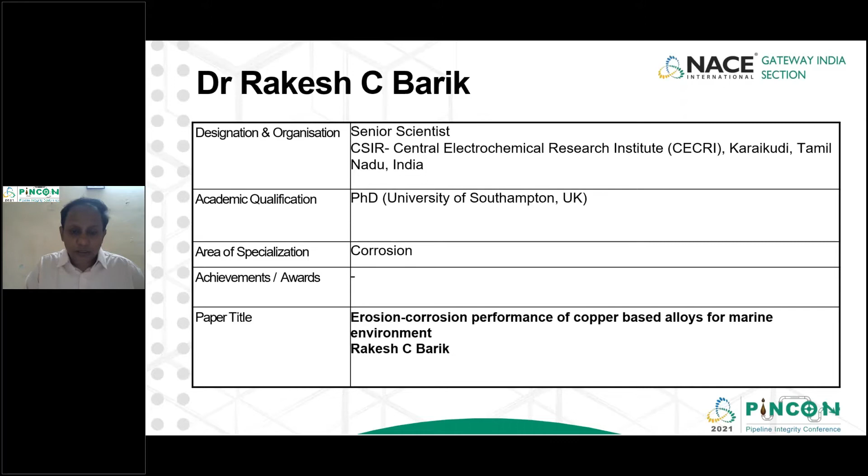One of the areas I focus into is erosion corrosion. So what I'm going to talk about is copper-based alloys, and we all know it's very widely applied in naval applications or in marine conditions.

However, pure copper is not much used. But when it comes to alloying elements like cupronickel, aluminum bronzes, or nickel aluminum bronze, which is nothing but copper-based alloys, they have extensive application in the marine environment.

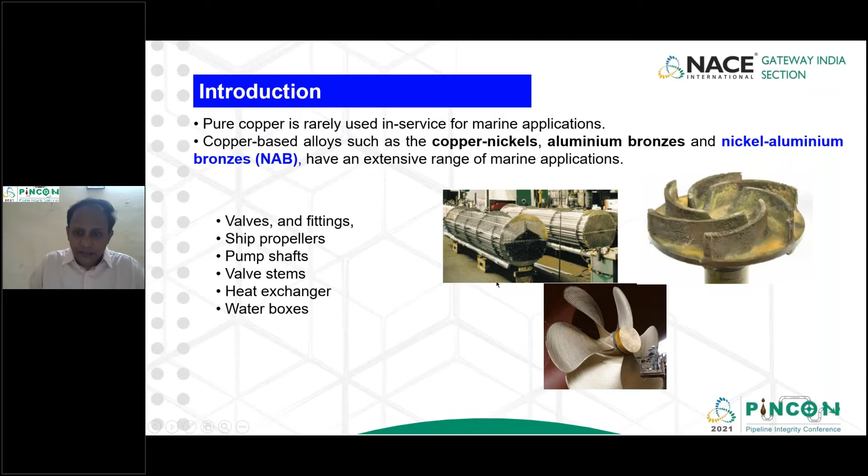If you look at these components I have here, like valves and fittings, ship propellers, pump shafts, valve stems, heat exchangers, and water boxes, these are the wide applications of this copper-based alloy.

And here I have the properties. For example, when you look at a component, if it's in open sea water or in dry dock condition, what properties can influence your corrosion behavior? Whether it could be shear stress, or mass transport due to flow corrosion, or having a protection strategy like cathodic protection, or various environmental parameters like temperature and salinity.

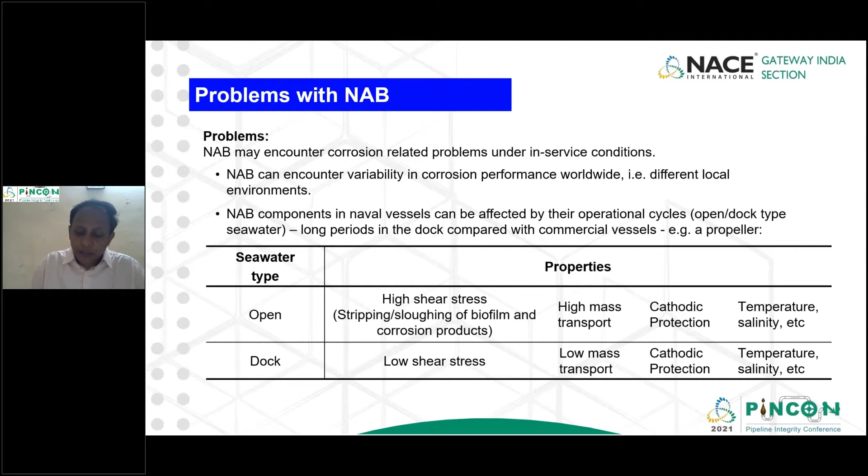But all these properties can vary from one place to another. That's why these components are affected by the operational cycles, which is very tricky when you choose copper-based alloys for a marine-based application.

In this particular research, I took a nickel aluminum bronze, which I'm going to talk about in terms of composition and all that. I studied mostly the flow corrosion, erosion, and erosion corrosion behavior, and compared it with an alternative, which is actually a coating. The coating was achieved using HVOF coating.

It's called high velocity oxy-fuel process. In that, I coat this nickel aluminum bronze material on the surface of a mild steel to achieve this cast NAB property. So now we'll see, as we go through the presentation, how it behaves.

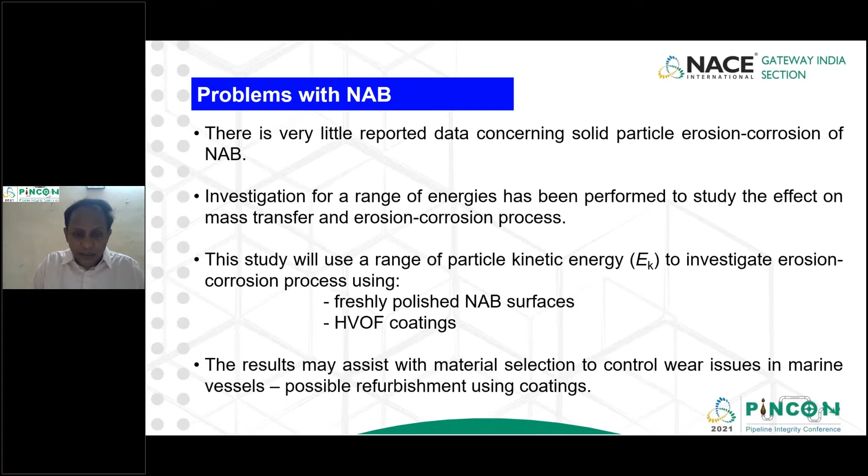So this is the actual composition of the cast NAB. If you look here, the major component is copper. Though its name is bronze, it doesn't have any tin content. This nickel aluminum bronze contains major components like nickel, aluminum, and iron. We can see aluminum comes to 9 to 10%, nickel and iron like 5 to 6%, and the rest of the elements are like chromium, with the balance being copper.

Then I'm comparing with the NAB coating, which is done using a spraying gun, diamond jet HVOF spraying gun, coated on a bare steel surface, which is 4360 steel, and also compared with AB, which is only aluminum bronze, where you have a variation in the composition of aluminum, nickel, and iron, plus some other components like molybdenum and silicon.

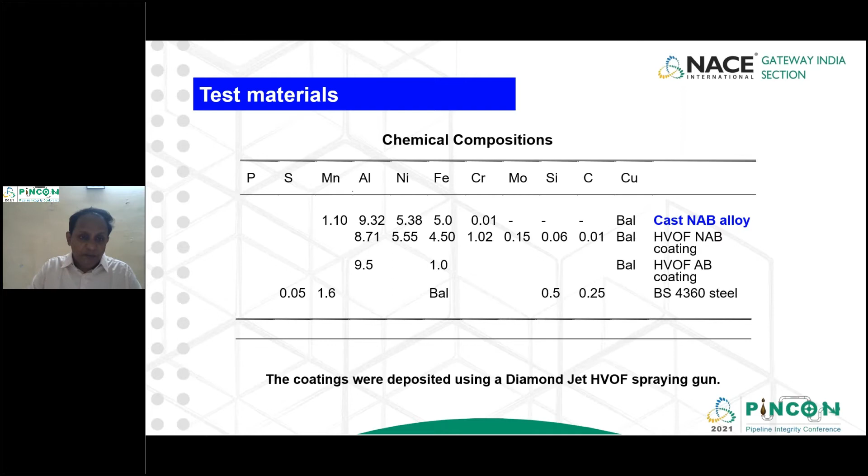But the wonderful thing about this alloy is its microstructure, which has various different phases, five different phases: alpha, beta, kappa. Because of these different phases, it has a very high chance of undergoing selective phase corrosion.

We know that in case of brass, where you have a copper-zinc alloy, the zinc selectively corrodes because it's highly electrochemically active compared to copper. Similarly here, looking at the phases, the alpha phase which is rich in copper preferentially corrodes in seawater, which has been seen in this condition.

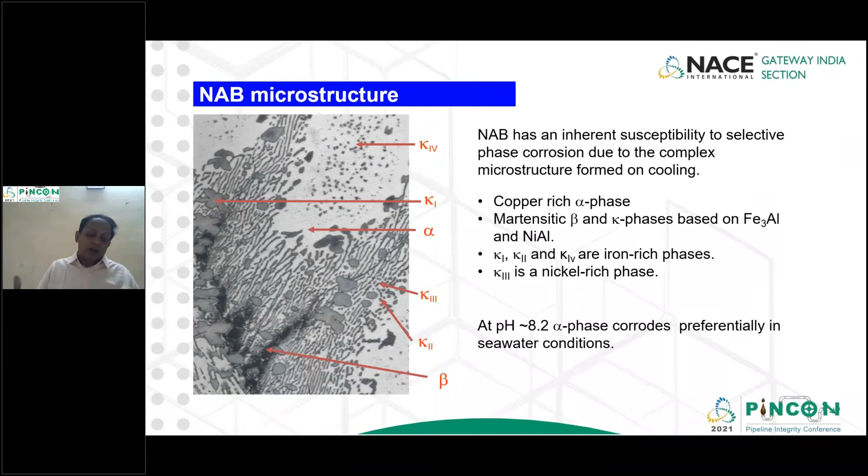Now I'm going to look at these behaviors in an erosion and corrosion environment. Before I talk about the basics of erosion and corrosion mechanisms, I will discuss the basics of copper metal when immersed in a chloride environment.

If you take a piece of copper and immerse it in a chloride environment, the major cathodic reaction is oxygen reduction. This reaction produces OH minus and involves a 4-electron process. With further complexation of chloride with copper, you get a copper chloro complex, and that complex can form cuprous oxide.

This is very tricky. The formation of this cuprous oxide, or its transformation from cuprous to cupric, is only encountered in a metal like copper in a static case. But the moment we go to flow condition or the erosion corrosion condition, the formation of copper oxide becomes limited and doesn't actually form, as we will see in one of our examples.

Here I have a base copper metal, and this is our classical anodic reaction. The electron leaches out and releases from the copper, and reacts with oxygen and water in the bulk media, forming a cuprous ion. The cuprous ion can then react with chloride to form a cuprous chloro complex.

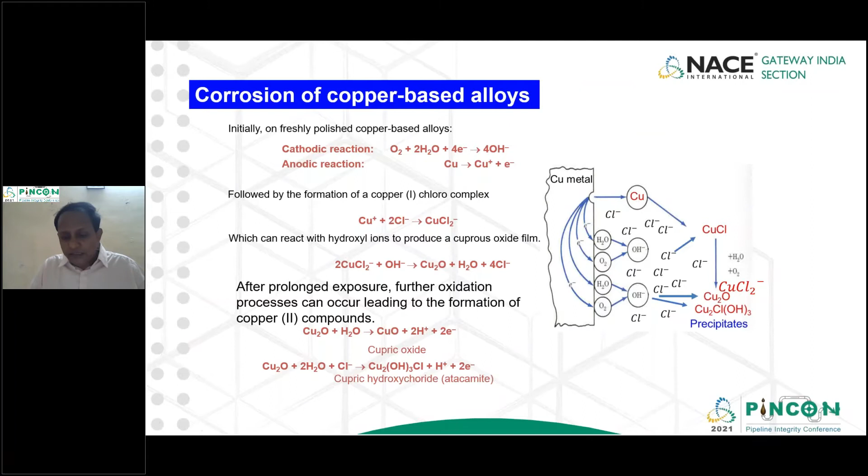Then it forms a lot of precipitates, like green color precipitates, and you end up having atacamite. But all these phenomena are seen when there is a static environment. The moment we go into flow condition, that changes, as we'll see. But here the other one was pure copper.

Now I'm talking about the corrosion mechanism of the NAB, nickel aluminum bronze. Below the substrate, since this nickel aluminum bronze, once exposed, has different layers of oxide film formation. One good thing about this alloy is the formation of an Al2O3 rich layer, and this layer hinders the transport of copper ions to the upper surface or to the bulk liquid, preventing corrosion.

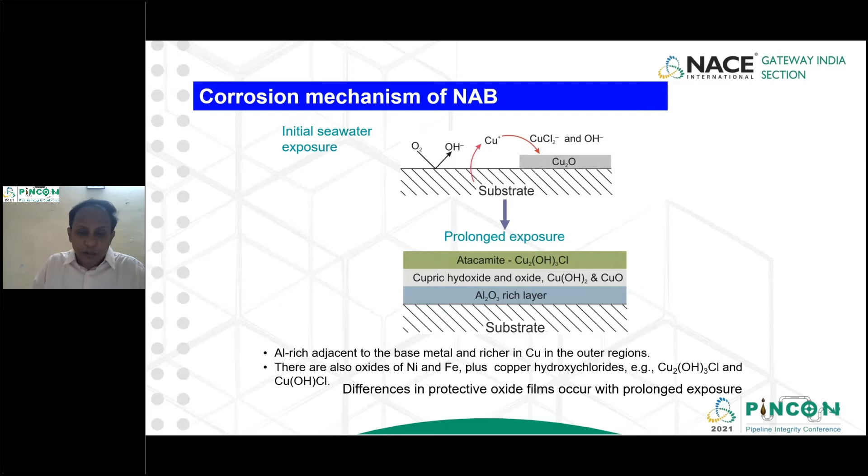But this is what we see - in addition to copper, you'll have another layer called aluminum oxide.

Now I'll go into the experiments I carried out for this particular work. The first experiment is corrosion, also called flow corrosion, where I have a liquid of 3.5% sodium chloride solution passing through, creating a jet that impinges on the surface at a velocity of 3 to 6 meters per second.

Then I go to erosion, which is nothing but a mechanical process. For example, like preparing a surface for painting, you do sand blasting or grit blasting, trying to remove some corrosion product from the surface. This is a similar process - it is mechanical, there is no corrosion effect.

Even though I am using a sodium chloride solution, I'm suppressing or completely eliminating its corrosive nature by holding the substrate at minus 200 millivolt overpotential. I'm calling this cathodic protection. You could ask why not go up to minus 1 volt, but then other complications arise, like hydrogen gas evolution. So to prevent that, I just go below the OCP of copper by adding minus 200 millivolt. That way, I'm achieving the erosion condition.

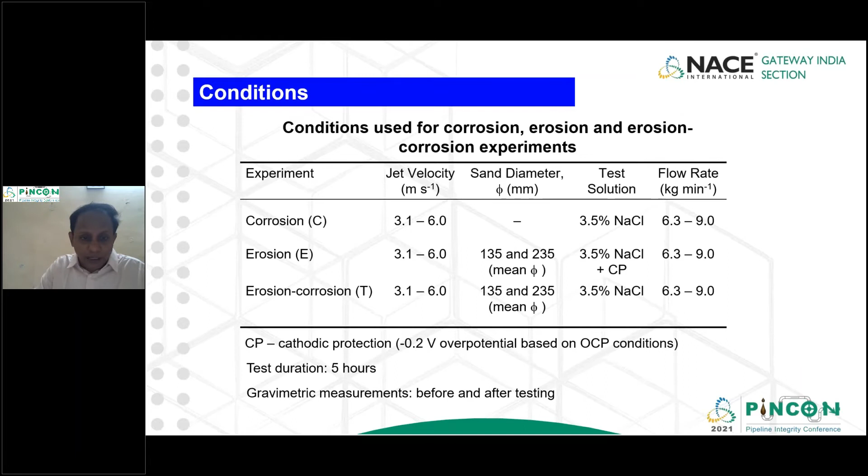This mechanism, like the formation of cuprous oxide or cupric oxide, how it varies from a static to flow condition. This is a very small cell, and in it we can study the electrochemical behavior, looking at the potentiodynamic or impedance response. We could do that, and I could see the formation of cuprous oxide.

I will show you some results. But if I look here, this is a reservoir, full of 3.5% sodium chloride solution.

In that, a small bucket is there which contains sand. So what happens: there is a pipe, I put it here with a filter, and it's pumped through this assembly, through the jet impingement setup. The liquid comes, goes, and hits the surface.

But there is another connection I have given here, called an ejector assembly. I have created facilities using different nozzles, creating a vacuum. By creating this vacuum, I'm able to suck in the sand and maintain a particular concentration of sand, which will go and hit my surface.

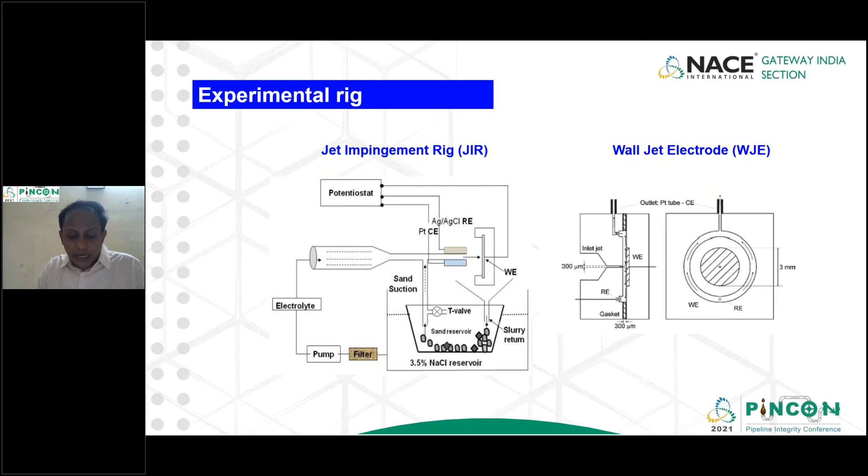Before I go into this experiment, I want to talk about the coating, because the whole idea was that this particular alloy, nickel aluminum bronze, we took as the cast metal. So what is the need of this coating? Because I deposited the same composition on a mild steel substrate, the whole idea was refurbishment, or maybe a cheaper alternative to a propeller based metal.

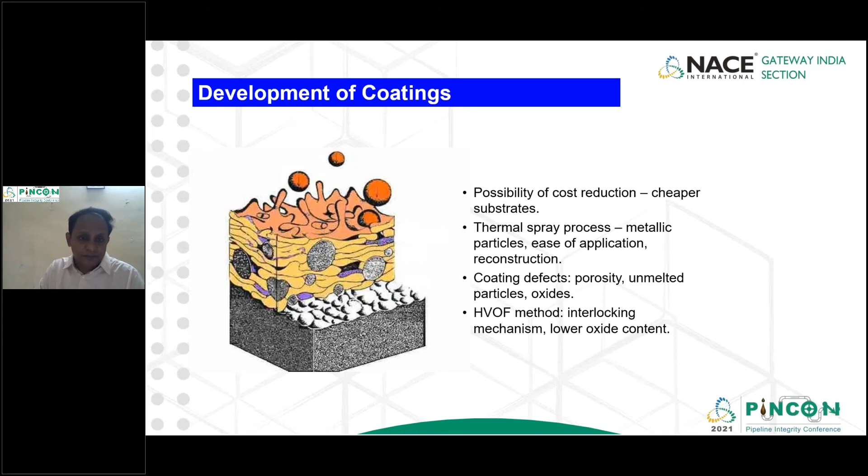This is the HVOF coating. This is your bare metal, base metal, 4360 steel substrate, and all that it was coated. Then we had also some partially melted particles and impurity of oxides, and some splat boundaries.

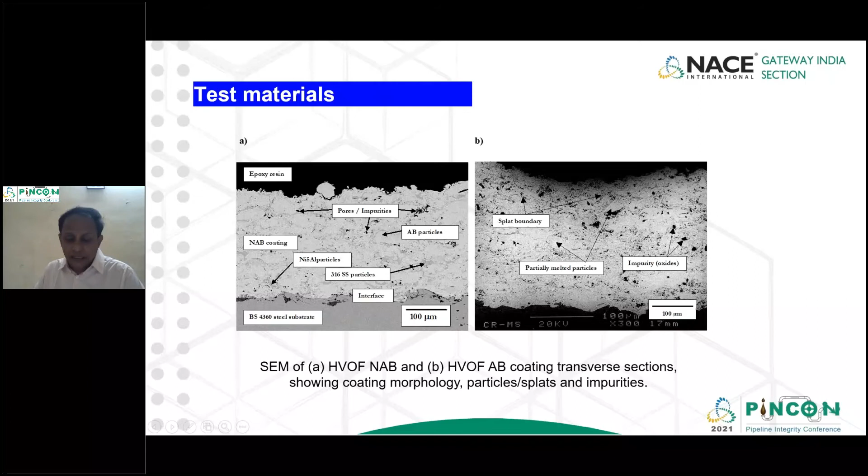So now I did the cast NAB, this green color. You could see that the cast NAB was behaving better than your bare substrate, the base 4360 carbon steel. Then also I compared with the coating. We also confirmed with the literature, and we saw that the flow corrosion rate is a little bit higher in case of a coating compared to the cast. It was like 0.8 to 1.5 millimeter per year. Then for the cast NAB, 0.5 to 0.6 millimeter per year.

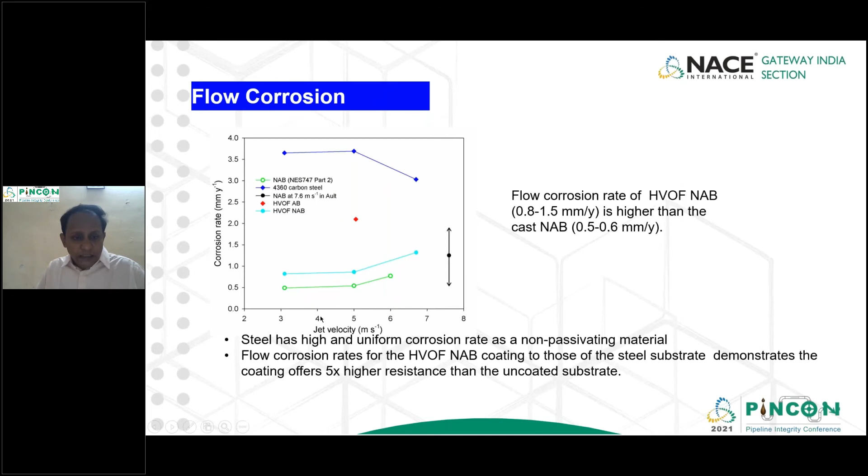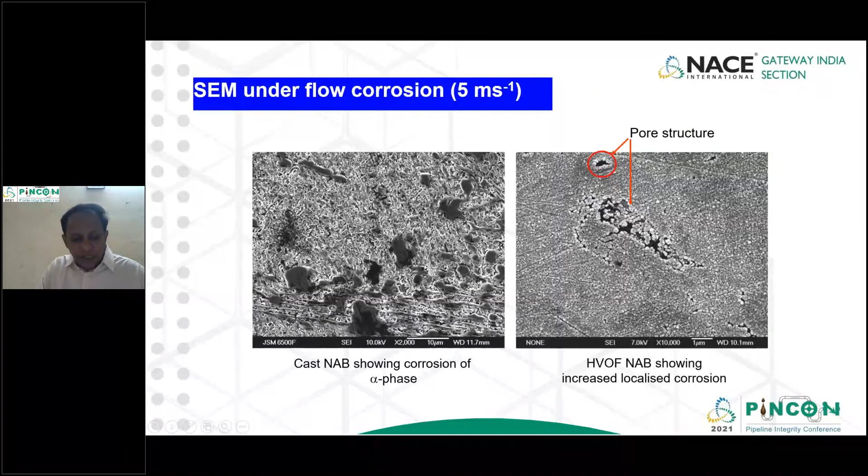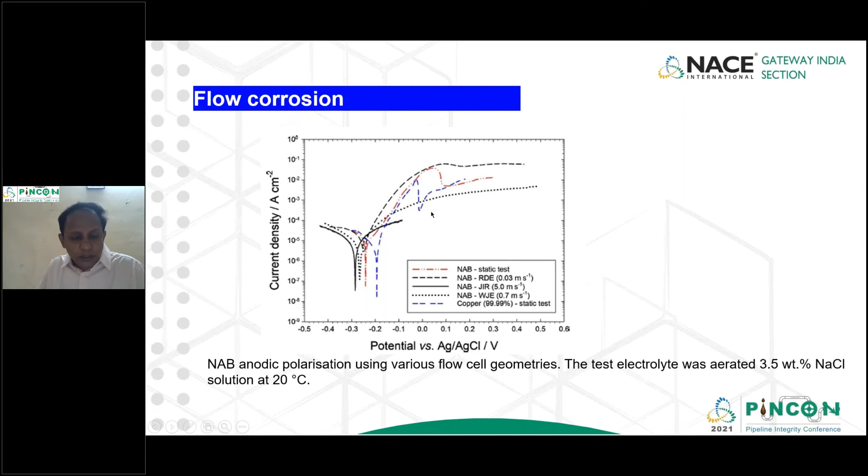But in this jet impingement case, I was not able to see the formation because that cuprous chloro-complex was not able to precipitate on the substrate and was carried away by the flow. So it was not able to give any corrosion resistive properties. This oxide film was not able to form. The same thing I could see here, the jet impingement shows complete dissolution, so the cuprous chloride complex was not forming.

Then I come to erosion. Erosion, because for corrosion we talk about a corrosion rate that is just millimeter per year. But when it comes to erosion rate, when I do a sand particle test, I put another equation, because I'm talking about the flow rate of the liquid, then the sand particle - that is nothing but the slurry which is forming, and the slurry has some size like 135 to 235 micron. So I look into the kinetic energy.

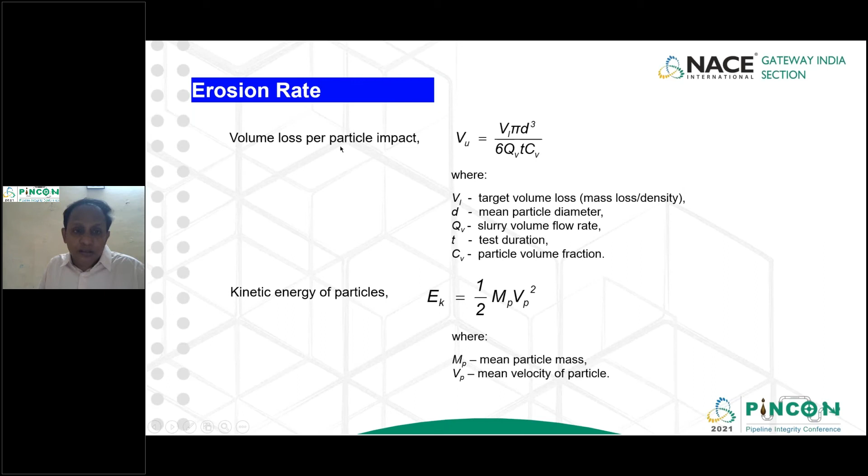So all these parameters I take into account and formulate a new equation which we call the volume loss per particle impact. This is the result, the volume loss per particle impact which we call erosion, and I looked into the kinetic energy, which is nothing but your velocity and the mass of the particle impinging on the surface.

Similar behavior - the cast NAB is here, this is the round one. You can see that the cast NAB at a very low kinetic energy also performs better. Erosion rate is less, but when you come to steel, it is very high. Similarly with the coating, it is also very low. This is what we have observed.

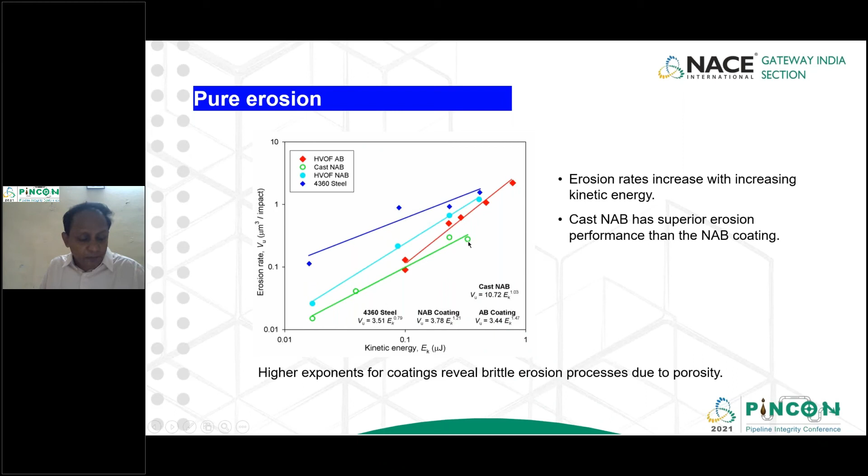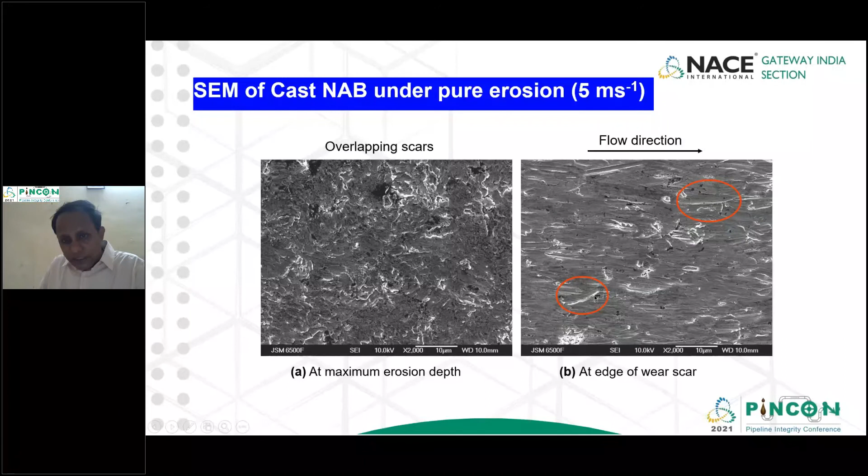Then you could see here, when the liquid is hitting with sand particle, you can see it creates some edge, the wear on the substrate. You can see these two very distinctive features creating a wear scar. Similarly, also in the flow direction, when sand particle goes and hits, it removes the material. This is what we observe.

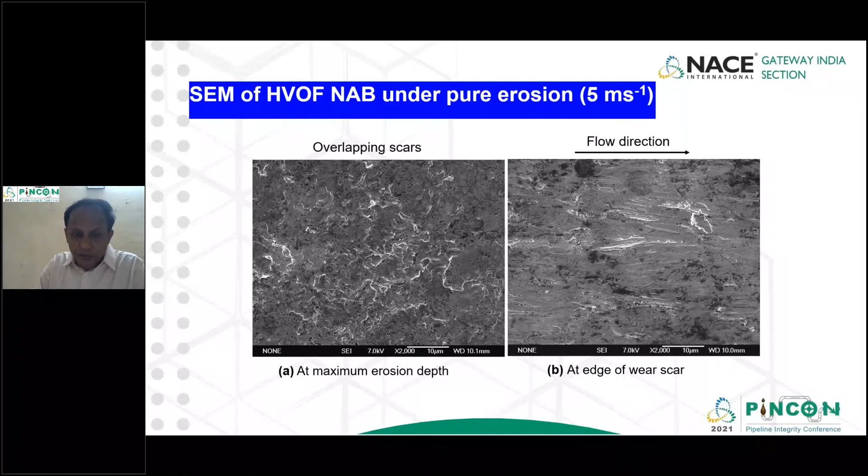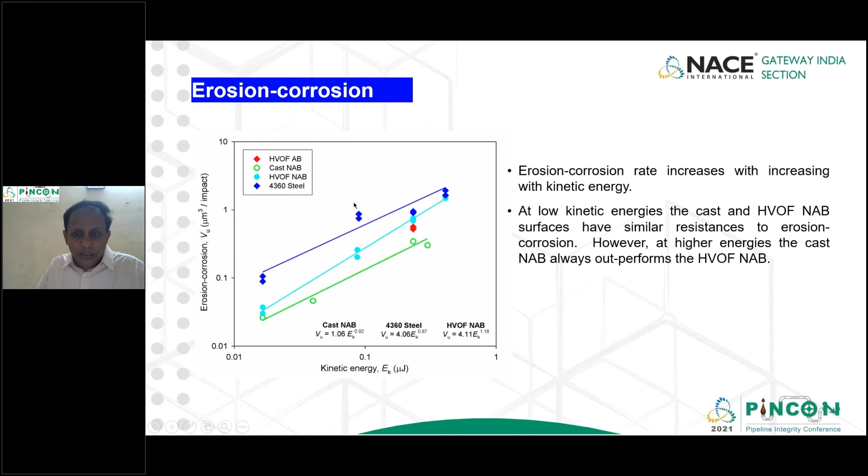Then we come to erosion corrosion. Similarly, I look at the cast NAB. At lower kinetic energy it's almost close to the thermal spray process HVOF NAB. But however, as usual, the erosion corrosion rate also increases for coating material compared to the cast NAB. The bare 4360 steel is actually very much higher. And we can see, this is very particular - if you zoom it, these are the phases.

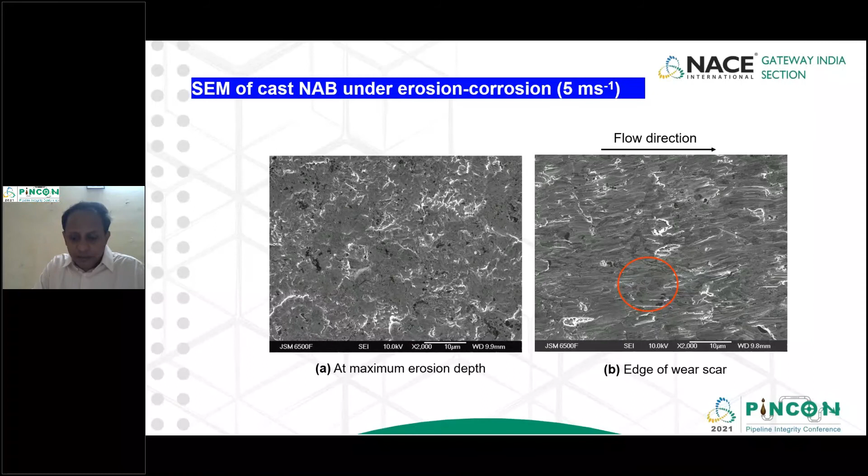We should talk about the alpha phase getting here, and this is kind of a wear scar happening in the direction of the flow. But when it comes to maximum erosion depth, that is when a sand particle is impinging, plastic deformation is happening. We can see the way, in one direction, the liquid is hitting along with the sand, and it's creating the wear scar.

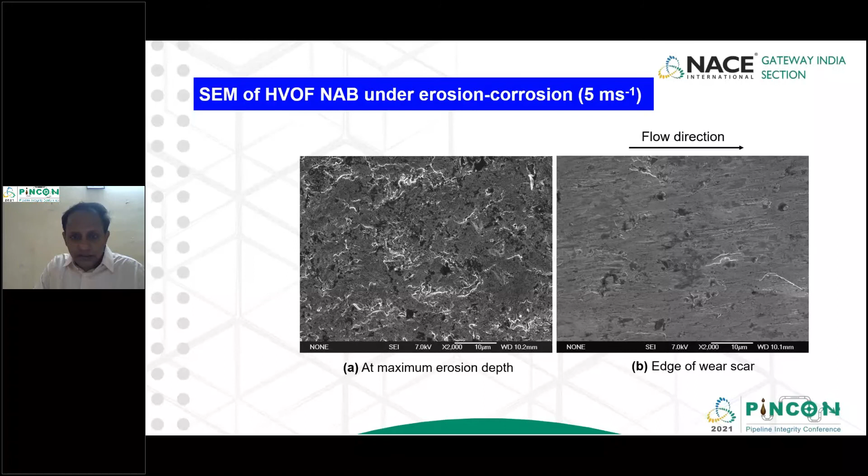Finally, what we talk about, we look at the synergy. This concept is actually very interesting to understand, because erosion and corrosion consists of three components: flow corrosion and erosion, then total erosion corrosion. But now synergy is another factor we came across. The total erosion corrosion should be equal to E plus C, but it was never. So there is another factor, it's called S, and that S is the synergy.

That is the difference, and that synergy actually decides, if it's negative what happens, if it's positive what happens. So we have defined that if you get a negative synergy value, that means you're giving some extra safety factor for the material. But if it's positive, that means your E plus C is less than the T. That is what we have seen in couple of cases.

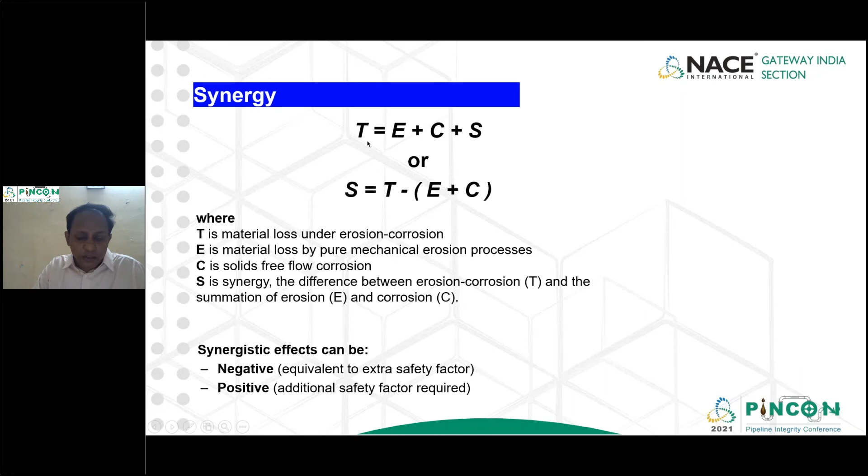What we do is calculate the ratio of synergy to percentage, and here you can see a lot of materials at a certain erosion rate, or if I look into the lowest kinetic energy, in that study all are negative value. But when the impact increases, the synergy goes to the positive side. So that indicates that this material is very sensitive, and it increases the corrosion rate.

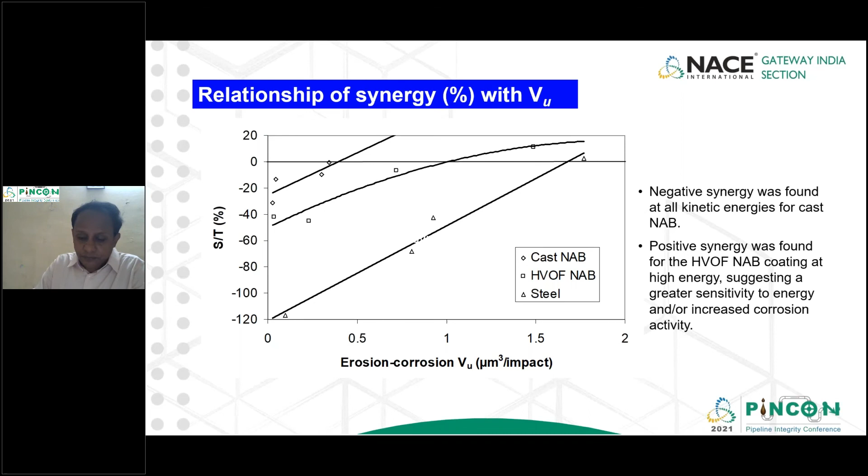So finally, what we concluded with these data, working with copper based alloys, nickel aluminum bronze, in erosion corrosion condition, exposed to various velocity from 3.1 to 6 meter per second. I concluded, just as an assumption, and here I have taken a particle diameter of 100 micron, but in my original experiment I took 50 to 200 micron.

In those cases, if I'm just assuming I have a component like pipe, valve, pump, and a propulsor, and I want to know before I design the component, what condition they can achieve. So for example, we conclude that up to 3 meter per second maximum a pipe can be designed. For a valve, you can have 5 meter per second. For a pump, you can have 10 meter per second, and a propeller or propulsor system, 25 meter per second, only within this energy range.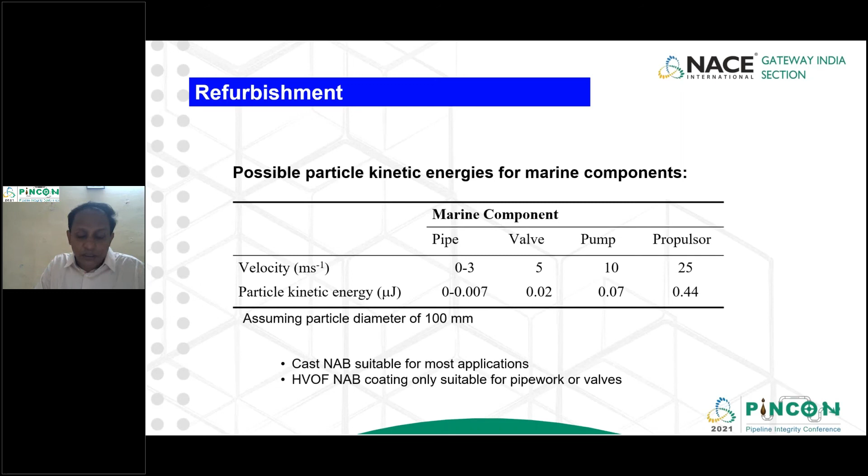So this is what we wanted to come up with, an idea of how you construct a marine based application, a component using NAB. This is the conclusion we gave. This is the summary of my work.

What we did was show that cast NAB had higher resistance than the NAB coatings under flow corrosion conditions. The coating had a very high sensitivity to impact energy, because of its network of cracks plus unmelted particles, flaw density, and splat boundary. However, the whole idea was that this coating can be used in low kinetic energy conditions, meaning when you're trying to refurbish a marine component.

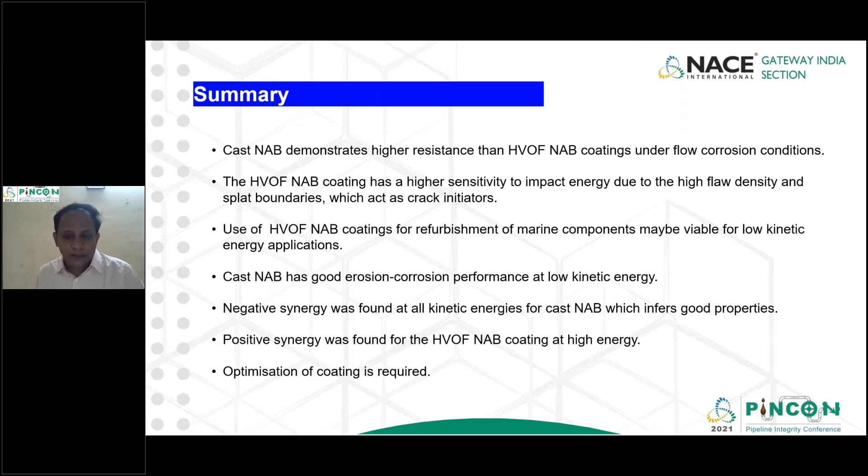Even the cast NAB showed good erosion corrosion performance at lower kinetic energy, and negative synergy was found at all kinetic energies for cast NAB, showing good properties. Positive synergy was found for the coating, meaning it needs to be optimized, and because of the way it's applied, its properties can be improved.

I think I've come to the end of the talk. Hopefully I was able to give some glimpse of the work on copper based alloys, nickel aluminum bronze, under erosion corrosion condition, using the jet impingement or wall jet electrode setup I have here. I've been working on this, and now also looking into how to inhibit the erosion corrosion condition in a 3.5% sodium chloride solution.